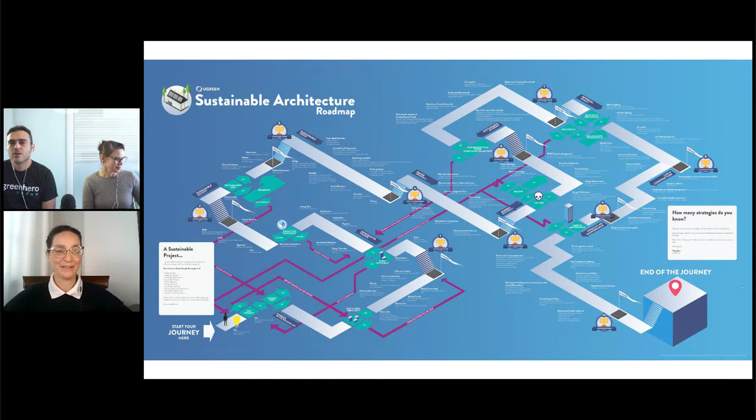Okay, so let's go to the map. 40 minutes on this class, so we need to go to water efficiency, and this is the next step of the process. Okay, let's go on.

So do you want to talk about the concepts first, right, Tisa? We'll put the map here so people can read about this. Just a quick disclaimer for people seeing me raise my hand and saying, let her speak. It's not a problem, we have a little time to say it all. Felipe is trying to keep us on track because otherwise you're going to stay here 3-4 hours. Don't worry, if it's important, I'm going to manage to sneak it at some part later, okay?

Guys, one thing, we are family. Sammy and Tisa are my sisters. We fight when we want to fight. We don't have problems, we fight and then we hug each other in the end, okay? So that's not a problem. All right, we can keep going.

Okay, water. First things first, analyze your weather at the beginning. We talked about it before, and see if it's possible to harvest rainwater, for example. So try to speak with your plumbing engineer and see what you need to add to your design in order to do that.

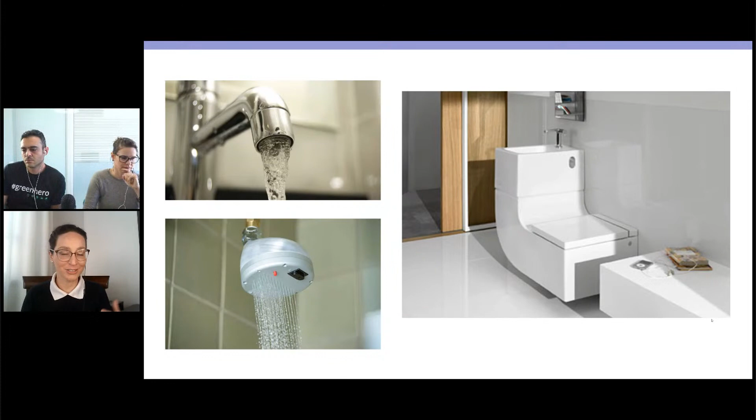You have a toilet lid sink, which is equipment where the water that one person uses to wash their hands will fill the toilet for the next person that is going to use it. So you don't waste water in the process, you're reusing it every time the equipment is used. This is a very interesting idea. Sometimes it's very costly because of the design, but I've seen this being adapted from a regular sink in a regular toilet.

If you talk to a plumbing technician, you might manage to do that too. So this water efficiency part is going to be faster. I think we can revisit this a little bit, maybe tomorrow we can talk about it more. We have lots of things to cover, guys, lots and lots of content. We'll give the best in these 2 hours for you, but we have lots of things to cover.

When we talk about energy, this is a very important part as well. We talked about the simulation, I showed you in practice. So this is a very important part, but when you are doing energy simulation, you are relying on ASHRAE 90.1. This is a standard that rules all of these things.

We have some alternatives as well, we put this for you, you can maybe search this yourself. And then we need to understand that we need to measure this amount of energy that we have. We need to measure things to make it better. If you are not measuring the energy consumption and the water consumption as well, as Tisa said before, you can't improve.

You can't know if you are doing the right thing, right? The idea is to do the project and see in reality. And that's why commissioning is a big part of this. Commissioning is a person who doesn't belong to the company, the architectural company or the construction company. It's a person that is outside this process. This person is going to analyze if the systems that were in the project are really being applied into the real building site.

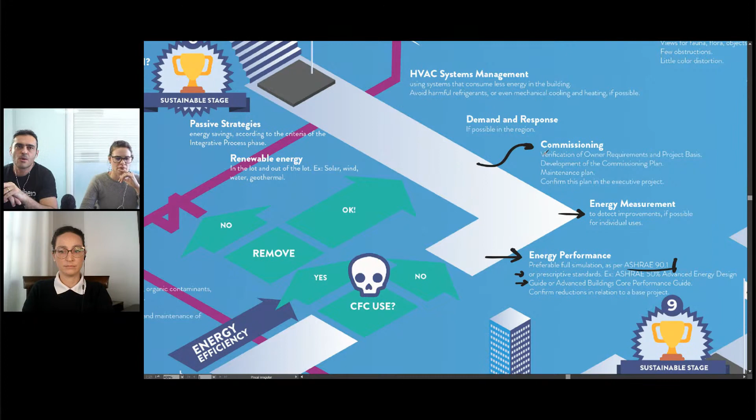And demand and response, depending on the region, we don't have this available. Here in our country, we don't have this available, but we put this to make it more complete for you. Demand and response is like this: maybe your city, people are using a lot of energy, and when they are using a lot of energy, the concessionary, the people who provide energy, they have a plan, an amount of equipment for this energy.

Sorry, what were you talking about? The plan, they usually have a plan, like a city plan with demand and response. And here in Brazil, they did a test in 2019, they started the first test. So the idea is this: if there is a lot of energy consumption, then your building can help the city by reducing some consumption of energy in some systems of your building. So this is an idea, and you can help the city recover from this huge energy consumption.

And then we have, of course, the HVAC, the refrigerants, the air conditioners that you are using. So you need to avoid CFCs. There are some places that use equipment with CFCs, but they are being banned more and more. And we have more effective refrigerants, so we need to use these effective refrigerants in your air conditioner systems.

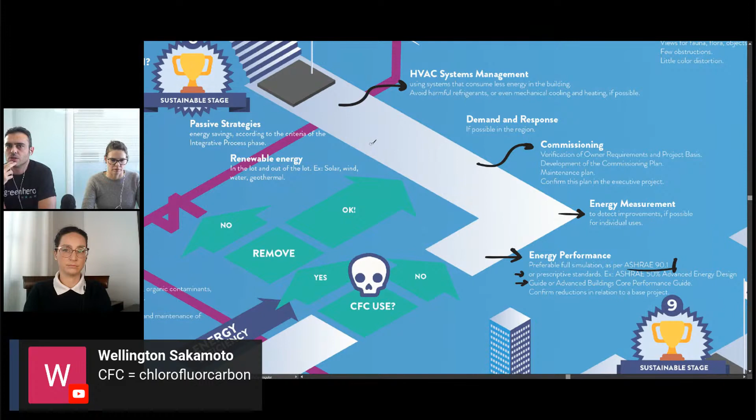Usually when you buy a new system, you are going to have these more sustainable refrigerants, but you need to check. When you are doing a building simulation, you can downsize the amount of this equipment, so you can reduce the amount of refrigerants that are being used in your building. So you are going to decrease the greenhouse gases when you are doing this. This is really, really important.

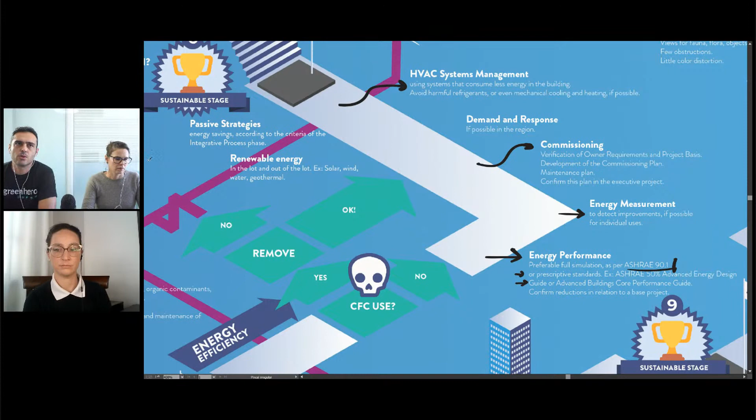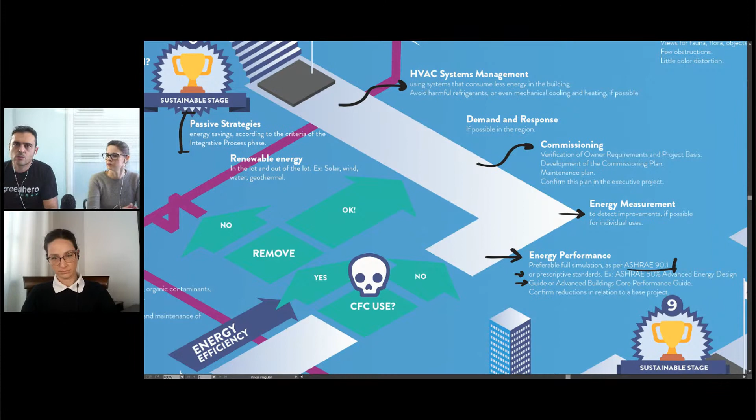And of course, we need to talk about renewable energy. This is the last step, since the use of passive strategies is part of the integrative process, right in the beginning on the map. We talked about the integrative process here in the last class.

This class is not available anymore, but we talked about the integrative process here, and we are here right now. When we talk about passive strategies, it's to put into practice and see if you got the idea you previously planned. Renewable energy is the last part, but sometimes people use this as the first and only part in the building, putting it over a building and calling it net zero.

There are people creating crazy certifications, putting prizes on projects like this, and this is crazy. I've heard this from a client too: he says they have a solar panel that doesn't work because it was positioned there just to certify, not in the best position of the building. It's shaded now by neighbors, and it's just there. So you understand how expensive sustainability done wrong can be - he has a system that's not cheap to install, and now it's shaded and in the wrong position, all because he just wanted a photograph to certify the building, to check that box. This is expensive - things done wrong, just for looks, greenwashing can be expensive.

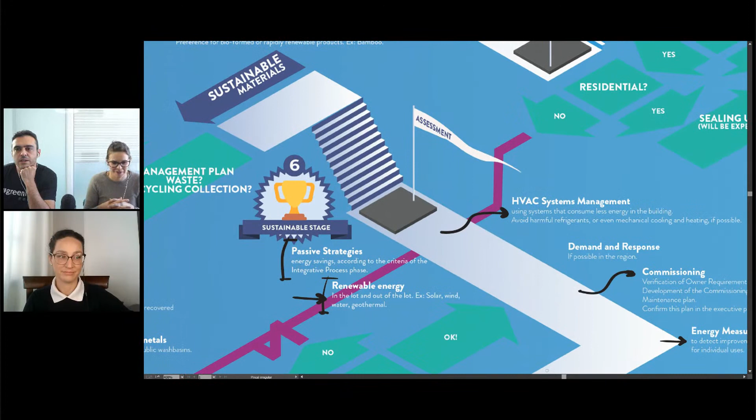So guys, we are talking a lot about renewable energy because we know it's the future, but people think this is the only thing that belongs to the future, and it's not. So we could put maybe a hashtag for this class related to renewable energy.

I will think about an inside joke while Sam is talking about sustainable materials right now. I think, okay? Jesse wanted to add something too.

I would just add that the hour your client is paying for you to think about the design costs much less than whatever renewable system you are using on that design. So if you spend more time thinking about it and designing it in a passive way, you will reduce the energy, and then they will buy less equipment. This is the logic, and they have to understand that. You can put photovoltaics in a shoebox and it will work, but is it sustainable? Come on.

Let's go, guys, I'm raising my hands. That's why I'm going to scream right now - Green Hero Rise, let's go on! Tell us in the chat what you've learned, because you are amazing and we want to know. If you learned anything, tell us, or if you're here and haven't learned anything, shame on you. People are screaming Green Hero Rise - I want to watch you learn, not just scream with me, but you can scream with me too. I'm sure everyone got the idea, and they probably scream at home too. If you always scream very loud, maybe we can explode the planet with the Green Hero Rise. I'm just joking, I just want to know what you guys learned so far. We're in a big office and can't scream as we wanted to, but we're doing our best so our neighbors are happy with us. But you can scream as much as you want, okay, let's go on, just joking.

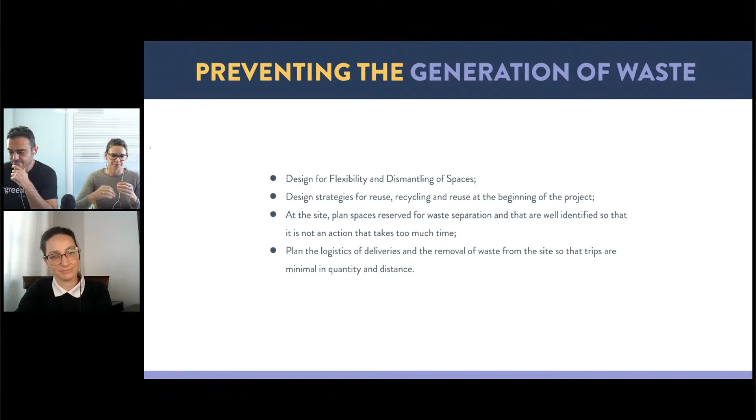When you're thinking on your site, properly condition your materials. A lot of materials are wasted because they are not properly kept on site, and sometimes rain and wind take away or destroy part of these materials. Also, materials have an expiration date, so buy wisely according to your project chronogram, because sometimes you can waste materials by letting them expire.

Plan the logistics and don't put materials together with dangerous waste. Broken mercury vapor bulbs cannot be thrown in the same place. Tiles with asbestos, different problems with paint and old batteries, plastic, anything that's contaminated, like air conditioning filters—all those things need to be separated properly.

We're getting a question. Last question, I promise: can I burn material on site?

No, that's not wise. You should not burn materials on site. I ask because I've been asked that on site, and I know in many places people do that, so it's important to note that's not the best idea. And if materials do go to incineration, they should go to a proper plant that deals with the proper filters, because sometimes a lot of the materials you're burning, even plastics, have fumes that can contaminate the air. So you have to be careful with that—if they are being incinerated, they need to go into a plant with the proper filters on the chimney.

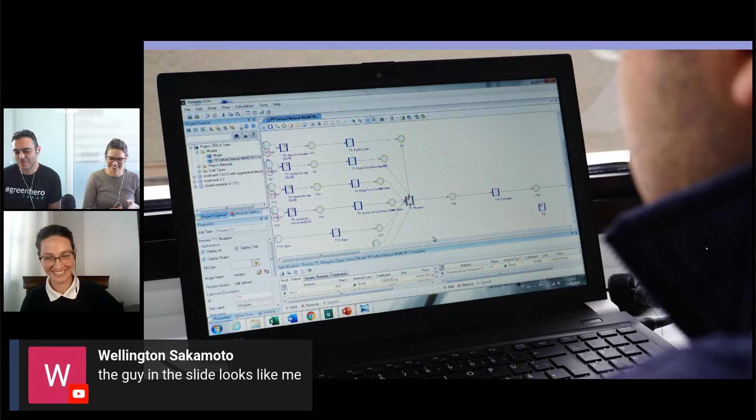Here you have a picture of Wellington, who you guys have been talking with on the chat. We promise we're going to have a better picture of him next time. Someone in the chat said the guy in the slide looks like me. Yes, Wellington is our chemical engineer here in the office—great joke, man.

Wellington is a chemical engineer. I totally lose track when the jokes come in, because I'm that girl who used to sit in the back of the classroom and laugh at every small or big joke—I couldn't contain my laugh. I was actually in the corner of the class. Because of my height I was always placed in the back, not by choice, but then I got used to it and liked it. I like the people in the background.

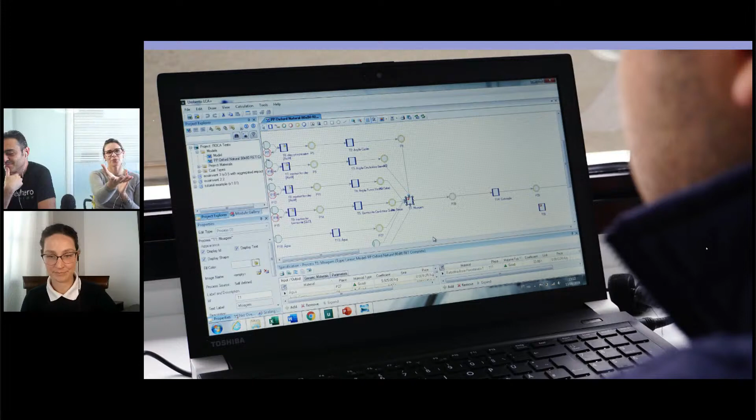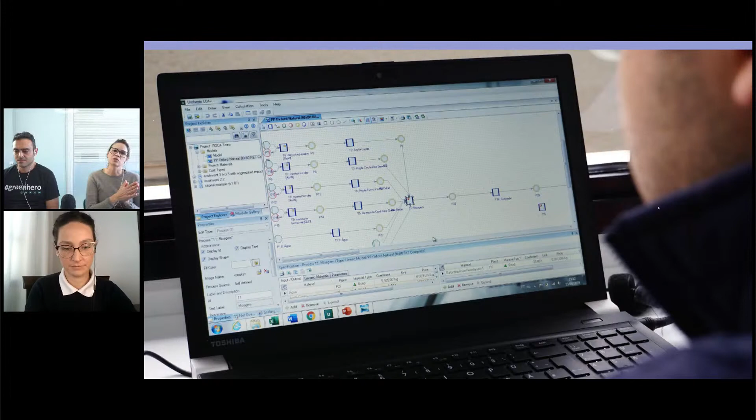Anyway, so what is Wellington doing here? As you can see, this is Umberto, a life cycle assessment tool that we use from iPoint, and this is part of our work here. Our involvement with materials and construction got us into the industry, and the industry was interested in relating to architects and engineers in a better way. They started talking to us, and we began developing life cycle analysis for construction materials so we could communicate better. This has been great work for us.

So materials was something like this, I think, right Sammy? Yes, and now we have something important—maybe you hadn't seen this. I will bring something new for you here: Green Hero Rise. Let's go on. I want to know what you guys have learned so far.

Tell us in chat, because right now we are going to have a very cool practice about natural light. People, it was the winner yesterday—it almost lost to artificial light, but natural light was the winner. So we are going to see this concept, and I want to know what you guys are learning so far. People are screaming out, right? Neighbors are complaining.

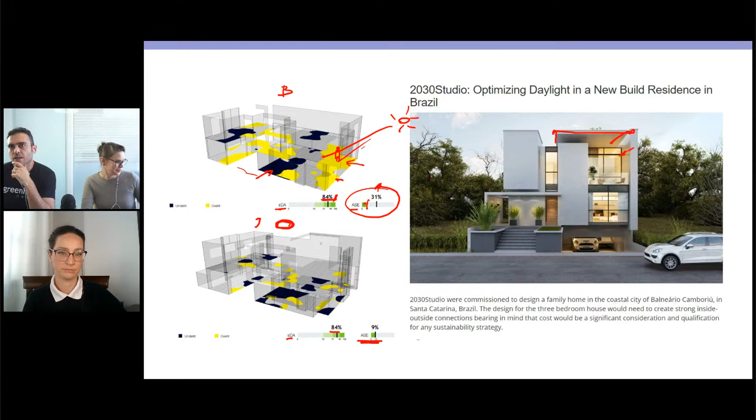So this is the way I do facades when I develop projects. I do consider this. So I did this shading device here, right? We can see the shading device here. I put this glazing, and did some depth here in this area. So we changed a lot on the building facade considering these properties. And then, of course, we might change properties in the glass if you want. So this is the major idea. And this was a project developed in Balneário Camboriú, okay?

But before we proceed to our building simulation, I'm going to do this right now with you.

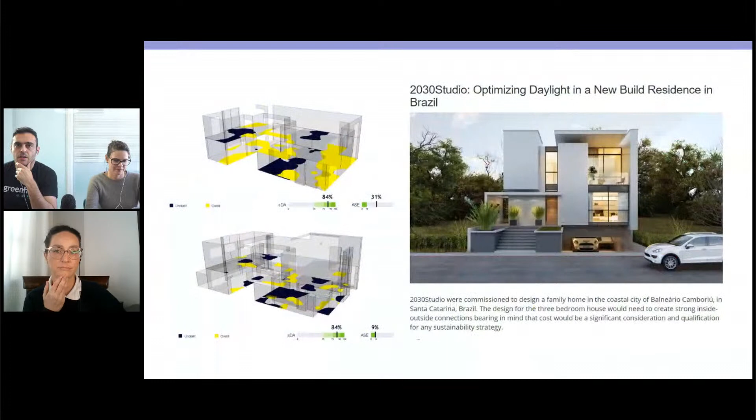And let's go on. So we have this study here, and now we can see the baseline as well. Of course, this area is not as important because it's a parking lot.

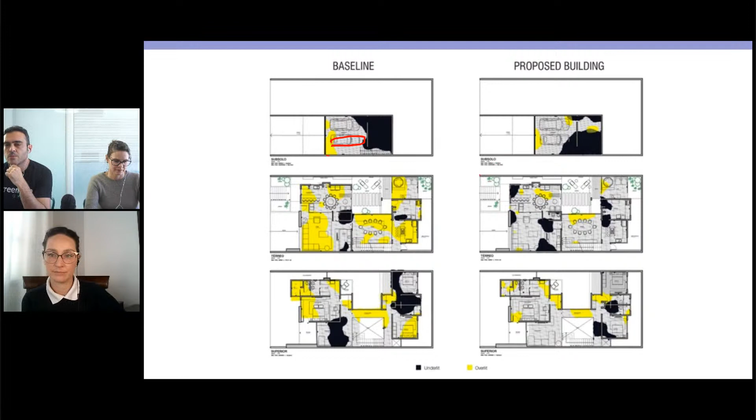You can see a car here, but we can improve a little bit. So we improved a little bit, and here you can see the improvement, right? These areas here, we shift into this. So this is very cool.

Bears are dangerous. Now we are going to see how we can calculate our daylight, and we are going to use a software here called Lightstanza.

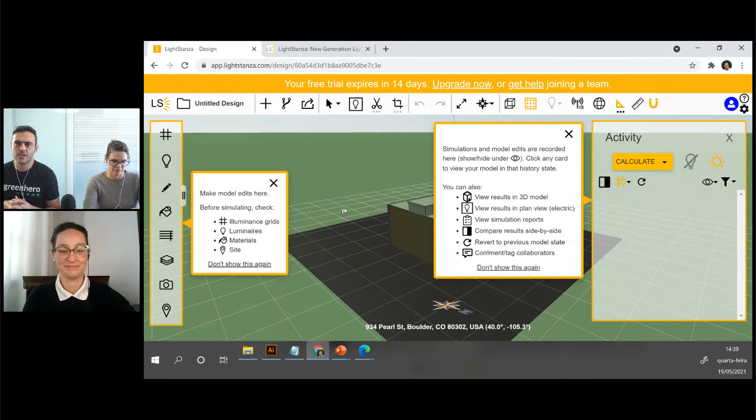That concept of SDA and ASE, this is a standard from IES LM-83-12. It's a very important standard, the most modern standard when you're going to analyze daylight quality in your space. If you get LEED certification or WELL certification, you will need to comply with this standard mostly, because it's the most normal standard. It's been out since 2013, 14, so it's new, and you are going to get the best, because we are bringing you the best.

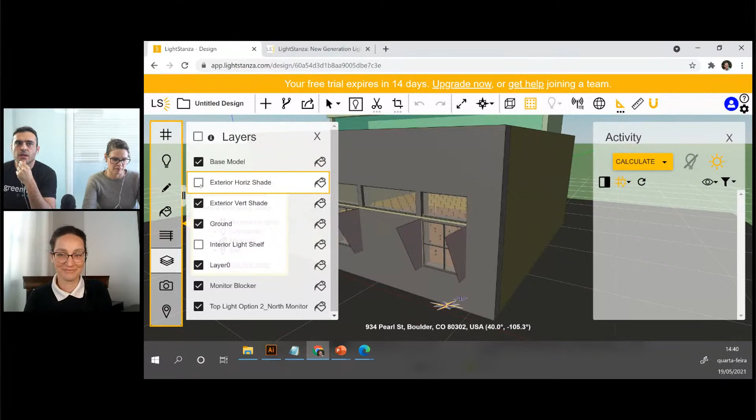So we have this school here. We can see the school, and we have some layers in this software, and we can turn on external shades, horizontal shadings and things like this, but I will just keep it as is, without the shadings.

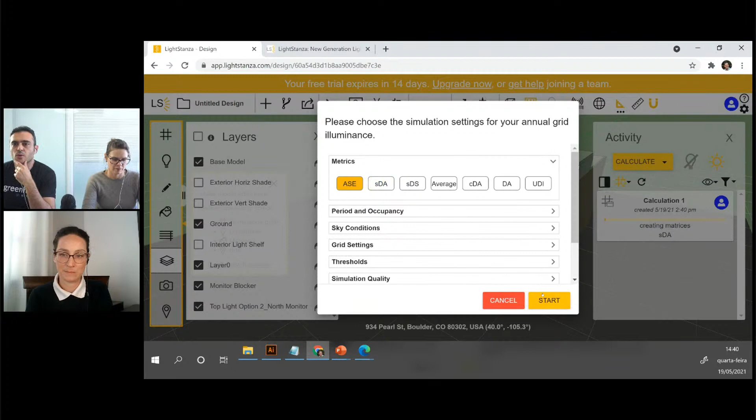I will calculate these two concepts: the annual grid illuminance, SDA, and then the ASE. I'll calculate the distribution, the optimization of the distribution in the space, and the amount of glare. So ASE for glare, SDA for distribution, and I will also do an external horizontal shade and an interior light shelf in the project, and calculate that as well.

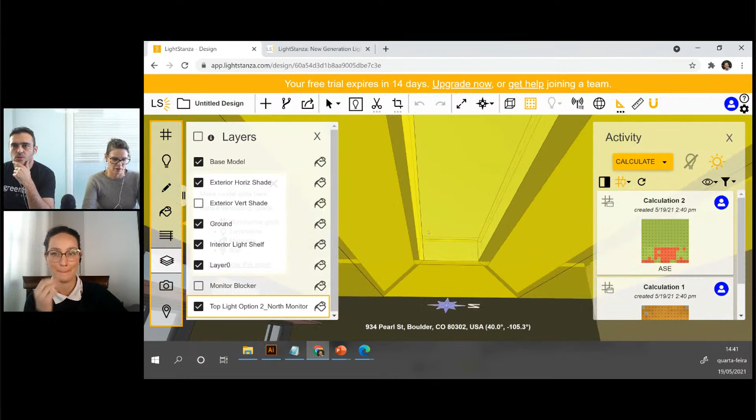I will remove this monitor blocker inside here, because in the first analysis that I'm doing, I'm simulating without the light coming from this place. It was closed. Okay, now I removed this.

Sorry, I forgot, laje, laje means slab. No, slab. Slab. Yeah, yes.

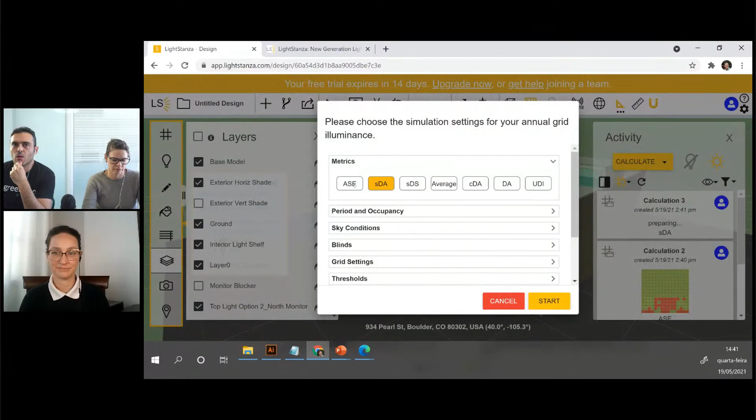So I removed the slab there, and I put the shading devices, and I will do the same calculations again, SDA first, and then I will calculate the ASE again. While it's calculating, I am explaining and saving your time, because we want to bring the best value for our time.

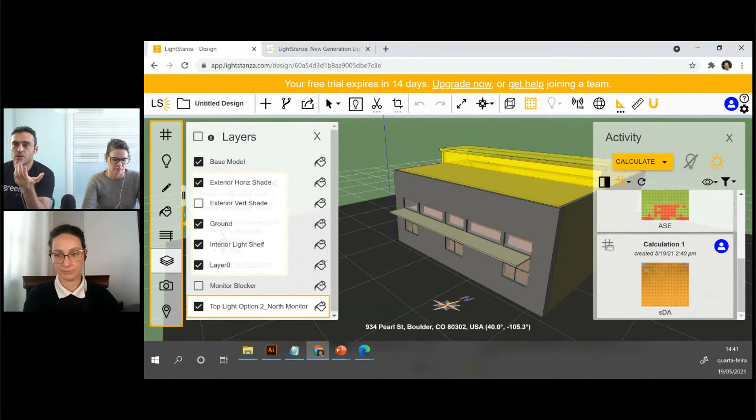So this is the simulation that I did first, without the shadings, remember, without the shadings and with this monitor blocker, without the clerestory window here. I will just click SDA here.

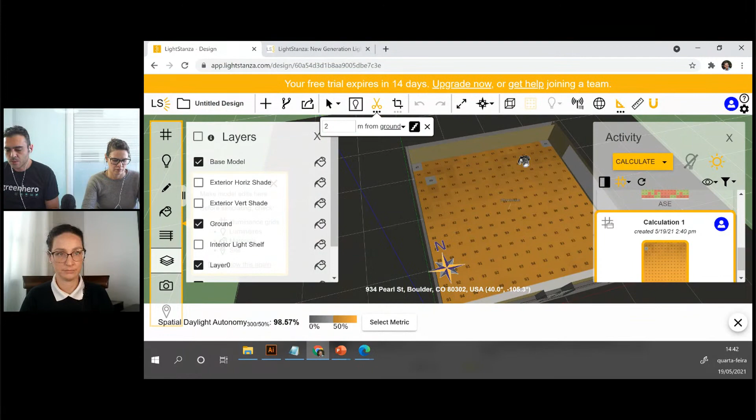And then we can see these areas here and what it means. You can see here, right, 89, 91, 93. So the concept is, okay, I will explain here. I will just put this in so I can explain better. Think about this, 90%, 93.

What I'm telling you is this: we have more than 300 lux in this space. 300 lux is a good amount considering a school, a classroom. I'm getting more than 300 lux for more than 50% of the hours in the whole year. I'm analyzing the whole year, and the simulation calculates hours between 8 a.m. to 6 p.m. For more than 50% of these hours, I have more than 300 lux.

We have actually 90% here, which is great. And here we have 47%, so I'm below 50%, and here as well I'm below 50%. But we reduced this amount of areas here with a good distribution. And we can see 66, 67, and this is great, actually an outstanding analysis on light distribution.

But when we look at glare, remember we are not using any shading devices here, we can see that we have glare.

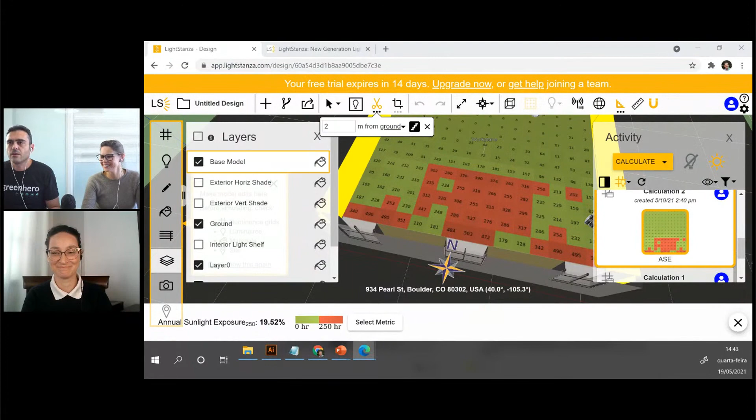And what does this mean here? We are analyzing the whole year again. Okay, once again, SDA, right? I will just recap, don't worry.

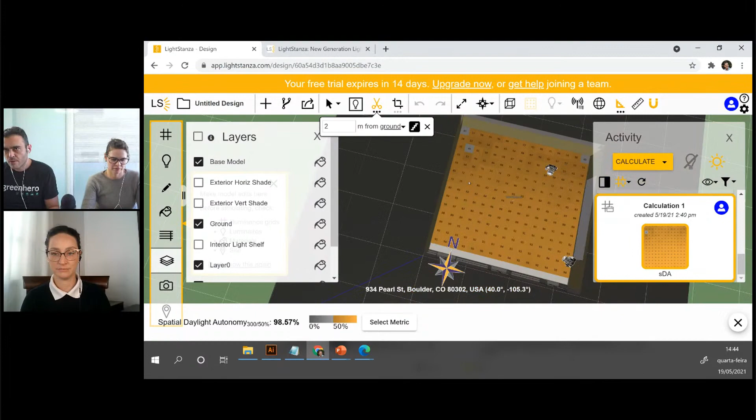So we have 93%, 92, and then here we have 49%, it's below 50%, 47, also below 50%, but we can see we have a very cool distribution in this space. When we see the ASE, remember we are not using any shading devices here, right? It's important to mention that. We can see these red areas, and if you see something red, you know that's a problem.

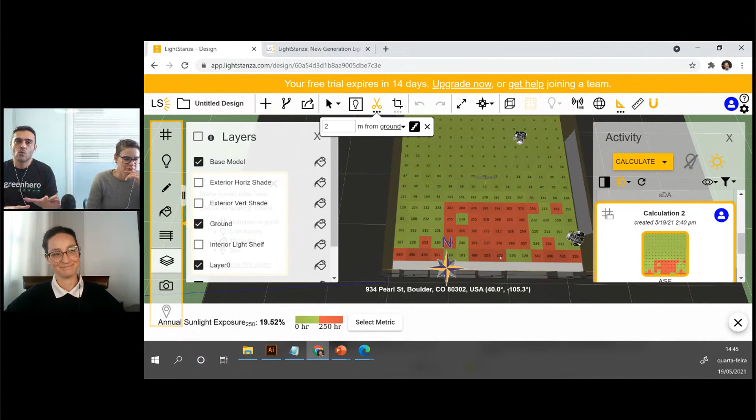I'm complicating things, let me just recap. I'm analyzing the whole year, and I don't want to have more than 250 hours in the whole year with more than 1,000 lux, because 1,000 lux is very hot. I don't need 1,000 lux, I need 300 lux. So we don't want more than 250 hours in the whole year with more than 1,000 lux. If I have this, we are going to have problems.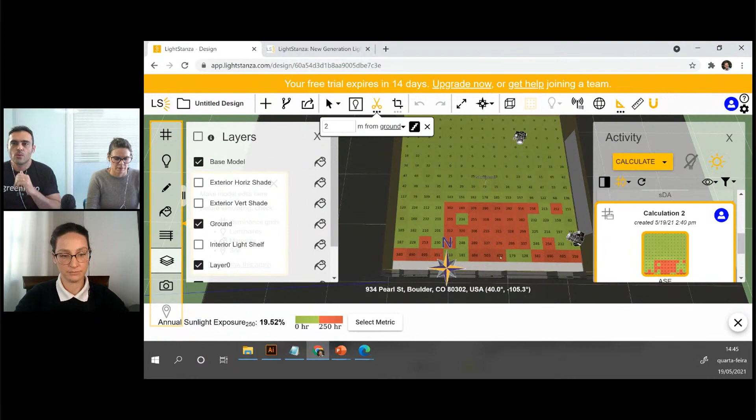So we have problems here. We can see we have a good distribution, a good amount of light here, but we have lots of glare. So we have good distribution, we passed this, but we got problems in this. It was like my project that I showed you.

But then I did another analysis considering the monitor blocker, this shading device here, considering this opened. And then I can see the SDA distribution. Distribution is fine, actually we improved it here because we had this window above the classrooms. So we can see 85% here, outstanding distribution.

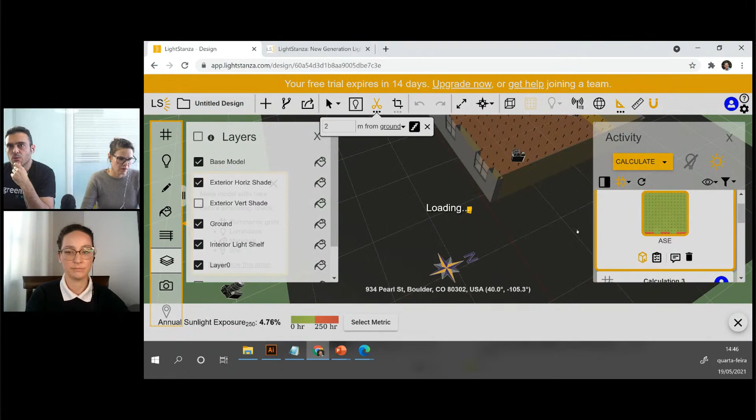And then when we see glare, we removed lots of glare, right? We can see now I just have glare in a small amount of the building. We reduced a lot of this glare. So this is the path for you to achieve a good project.

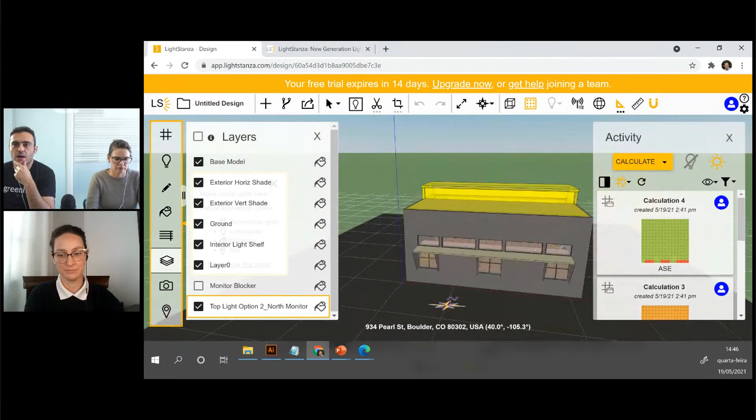Then I can put maybe an external shading device, I can change the design, I can change things, I can change inside colors of the building, that can make a difference. So I can put this and then analyze again, and try to avoid this bad glare here. Maybe you are improving your project, trying your best. So it's up to you. You understood the process, okay?

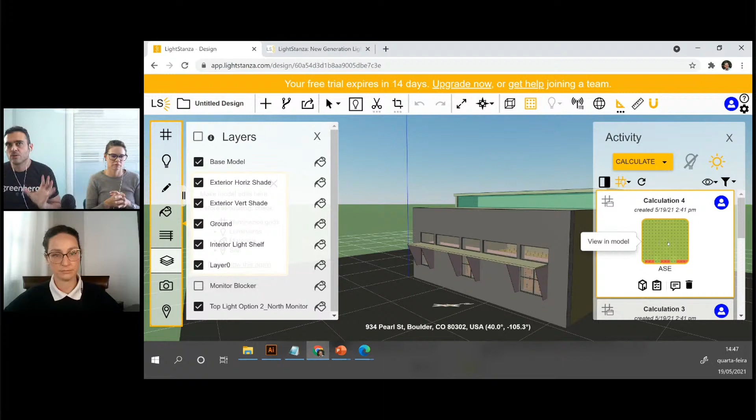So this is the way to do a natural light analysis, and I made a big summary just to show you this concept, okay? So you can try LightStanza, maybe you can see for yourself. We are not affiliated or anything, just showing the concept, okay?

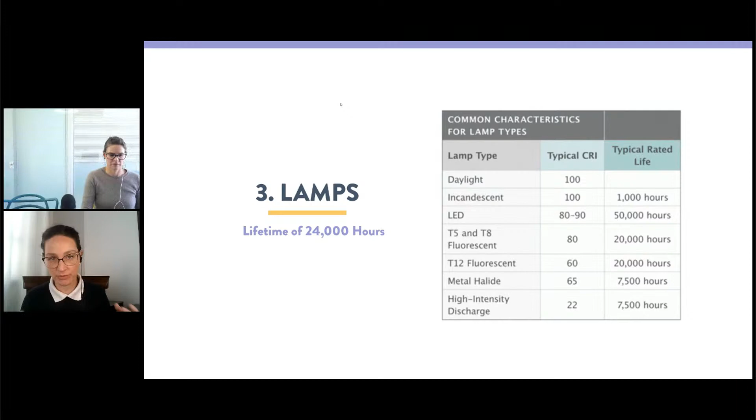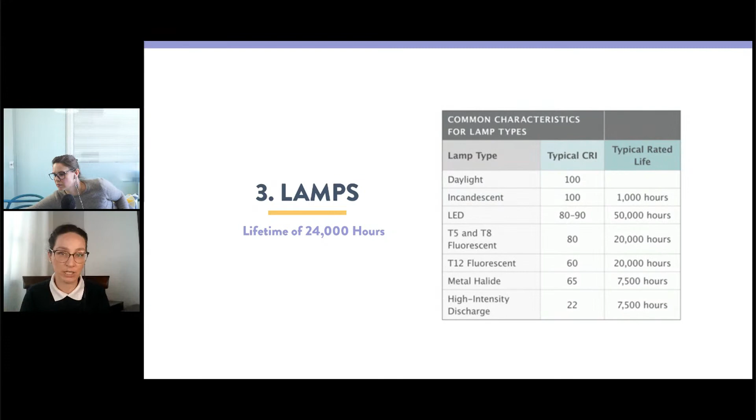You have to reach the light levels that the standard, the local legislation in your area requires, and also related to the activities that people are going to do in that space. So you should look at that.

But one thing that's really important to look at, besides the lifetime of that lamp, is also the luminous efficacy.

Am I saying it right? Luminous efficacy, yeah, it's the proportion. Efficacy, yes, thank you.

It's the proportion of light that a lamp provides by the power that it takes to work. So it's the amount of light it gives you by the energy it takes to provide that light.

So the more light it provides, the better, because it's using that energy to make the most of it for lighting, and not, for example, for heating, which is what incandescent lamps usually do.

This is why people prefer LEDs nowadays, because they provide more light while using less energy.

All right, Felipe? Yeah, we can go on. I'm alive, let's go on.

So we have direct lighting luminaires, and the idea is to have the minimum possible. And you can understand some concepts of indirect lighting.

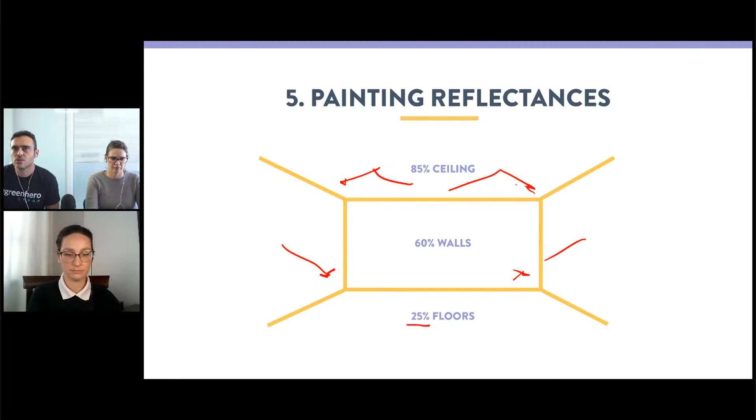And when we distribute light better, you're using light wisely, and of course you're going to reduce energy. So this is the major idea, and we can use this on furniture as well.

But 45% is good. And then we need to think about the contrast. Think about your space—let's say I have this.

Maybe I could share some artificial light simulations in one of our classes, maybe tomorrow if I have time, but we can see this. When we have this light amount, maybe we have a table here, right?

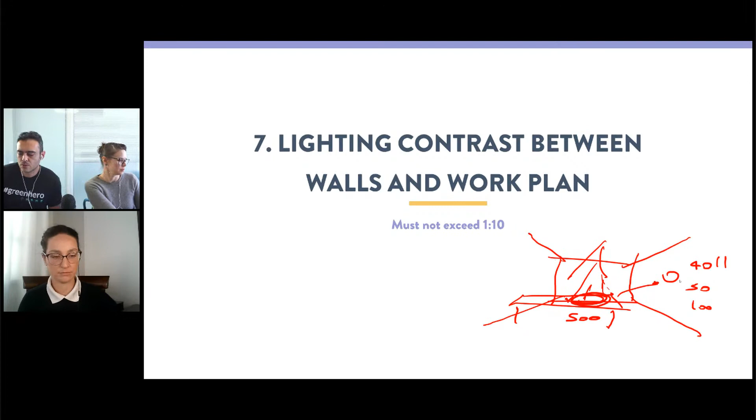We have this table and this amount of lighting over it, but we don't want, let's say, 500 lux here and only 40 lux here. It's not good because you're seeing here with 500, then looking here with 40, and that's a lot of difference. So you don't want to exceed a ratio of 1 to 10, maybe 50 here to 500 there. So 50 to 100 is going to be best, because you're looking here, then looking there, and it's not making a huge impact on your project and the quality of sight and vision.

We have hospitals, of course. When you're talking about hospitals, we are talking about control. We need to have individual controls, bring power to people. Patient spaces need to have control as well. And when you have multi-occupant spaces, you need to provide on, off, and mid levels. So these are three ways to do it.

This is great because maybe in your space, I'm just drawing here, let's say you have a lamp here, a lamp here, and a lamp here. Maybe you have a good amount of light here from the sun, but maybe here you don't. So if you can put a mid-level, you can put this space just to bring the supplementary amount of light you need, instead of using all of it and wasting energy that isn't needed at the moment. So this is the idea.

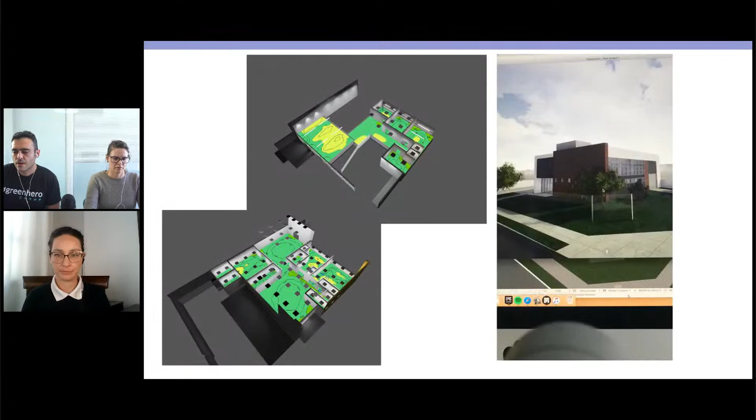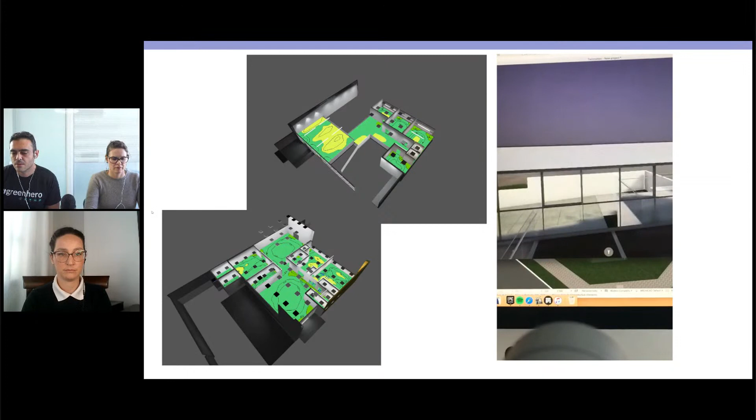This is a simulation we did in the office, for a project we were developing. It was in a very early stage when I took this, and we can see the same concept here, this amount of light that we wanted. Sometimes you need to change types of lamps, and this is also a great way to do things. So this is the way to go.

And we have a little bit about thermal comfort as well. We can talk about it very quickly. I will show an example of how we can deal with thermal comfort.

When developing thermal comfort, this is usually the worst, the most difficult simulation we need to do, because we need to deal with people, and people have differences. We have six phenomena in our spaces: the temperature of the place, the temperature of the surfaces, which is the mean radiant temperature, the humidity of the place, the airspeed, the insulation of the clothing, and the metabolic rate.

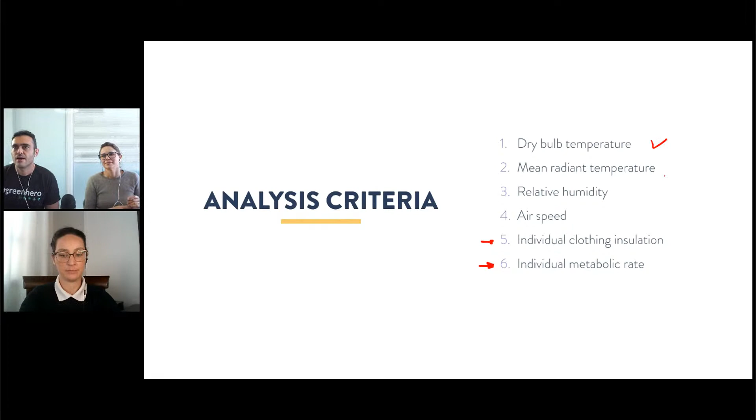Let's say I'm here with Sammy. It's cold outside. We can have the same temperature, the same humidity, the same airspeed, the same clothes, although hardly ever the same clothing since I'm usually cold. Let's say we have the same metabolic rate as Sammy, but if she's closer to the glazing, she can feel a little different about the weather. So these are the six things you need to analyze when doing a thermal comfort simulation.

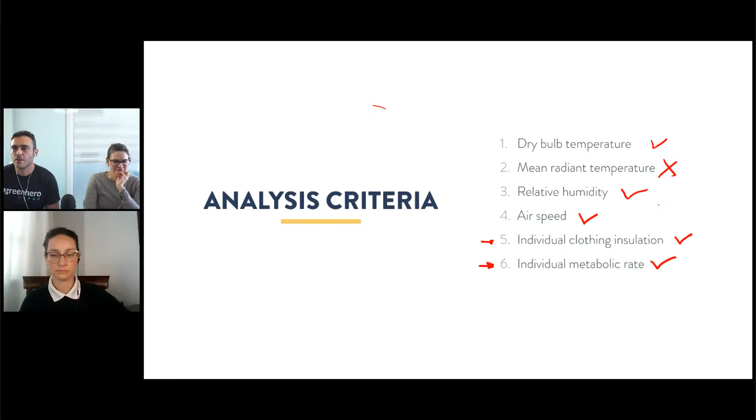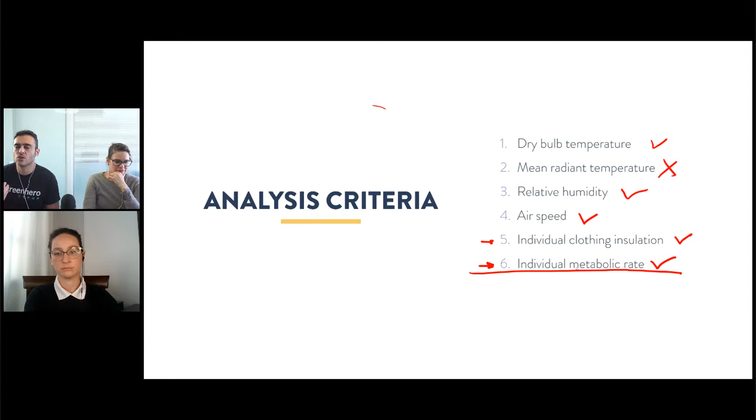Let's say we are in the same place, the same position, but Sammy is doing exercise. That's going to change her feeling about the place. Maybe for me it's good, but for her it's not, because she's exercising and feeling hot. So when simulating, you need to consider all of these things, and that's why thermal comfort is more complicated to analyze.

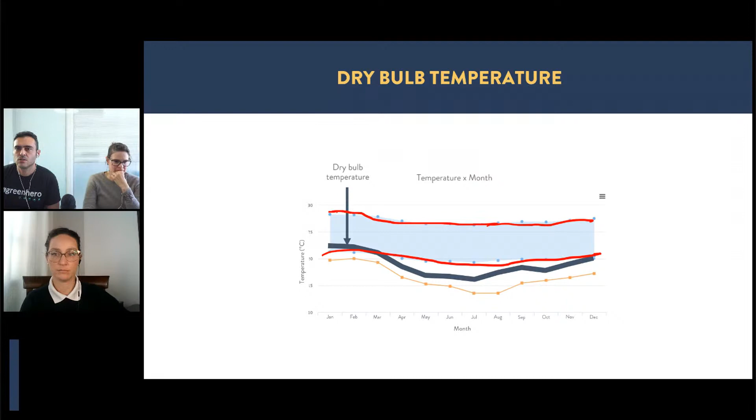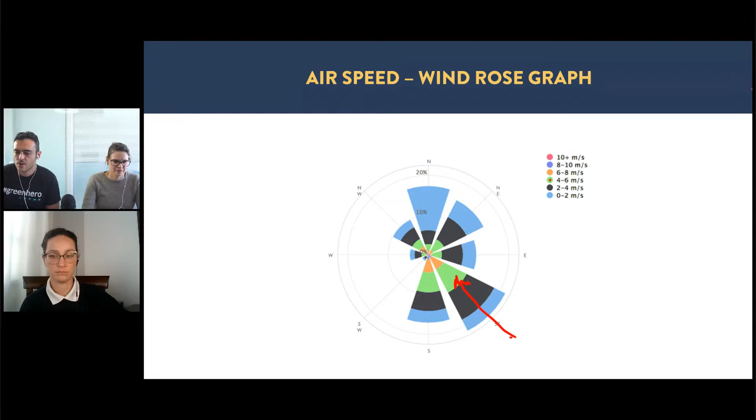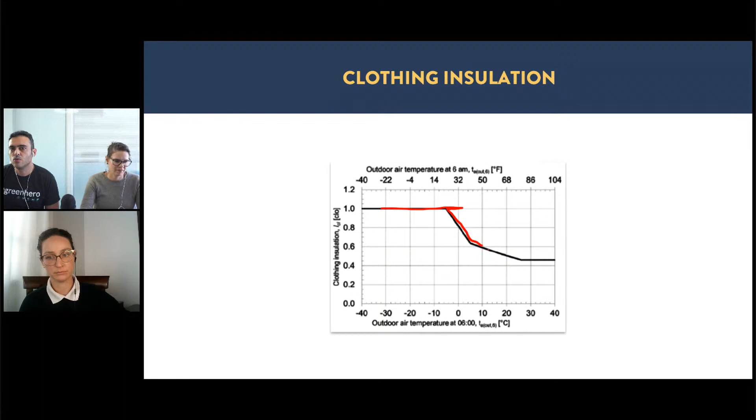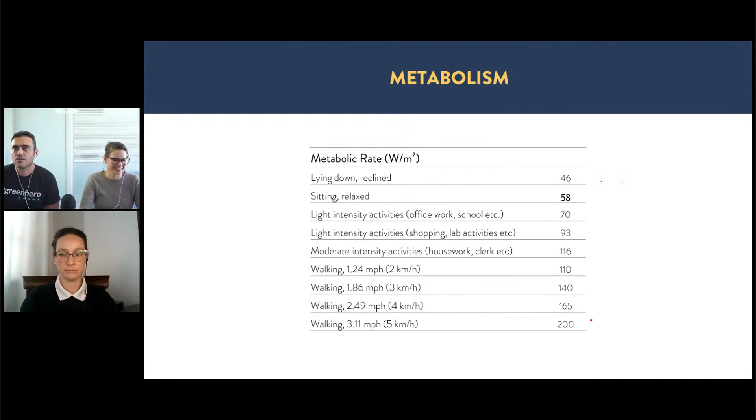We need to consider the clothing insulation. People have a clothing insulation, and during the day they maybe remove the clothes or something like this. So we need to consider this during the day, and we need to consider the metabolic rate. Sammy is, I don't know, walking, and I'm lying down or something. It's going to make a huge difference.

And then the standard that regulates this is ASHRAE 55, usually United States, and in European countries these are the standards that you can use.

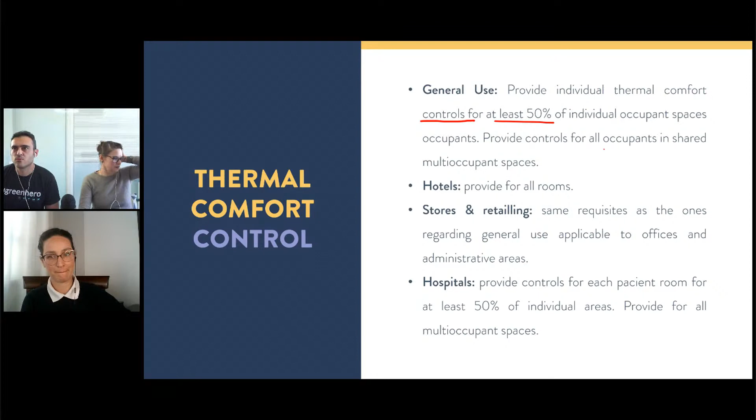Then we have some controls, and you can see the light, internal light and thermal comfort. It's all about controls. We need to see controls for individual occupant spaces. We need to provide controls for at least 50%. Multi-occupant spaces we need to provide for all occupants. And hotels, retail, you can see, usually we need to have more control because, as you can see, people are not the same.

They have differences. We have opinion differences here in Brazil about politics. People fight, families are dismantled because of politics. And thermal comfort is not different.

One thing about controls and thermal comfort is that sometimes there are fights in offices too. People like raising and lowering the thermostat. So you have to have some sort of policy and tell people why it's at a certain temperature, and people will feel slight discomfort. It's not a reason to be raising and lowering the thermostat, because then you are dealing with energy efficiency too, and this can be bad.

As Taha is telling here, ASHRAE 55 is for thermal comfort, ASHRAE 62 is for natural ventilation, ASHRAE 90 is about energy efficiency. We have NC 60 as well for acoustics. So we have lots of standards to cover.

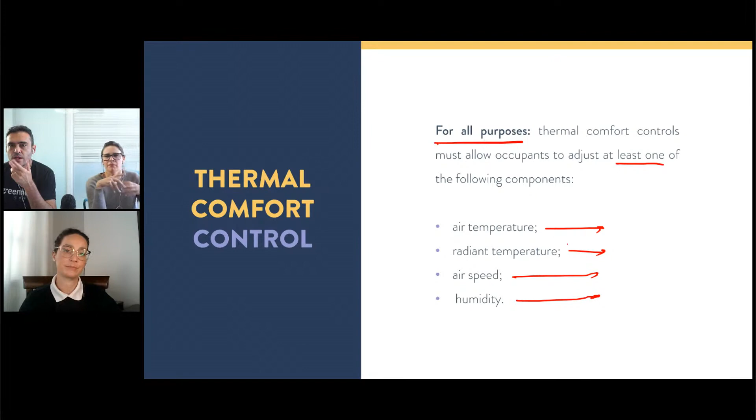And if you are doing truly sustainable design, you need to understand these concepts. So this is an idea: you need to provide, when dealing with thermal comfort, at least one of the following concepts: air temperature, radiant temperature, air speed, humidity. So this is the way to go.

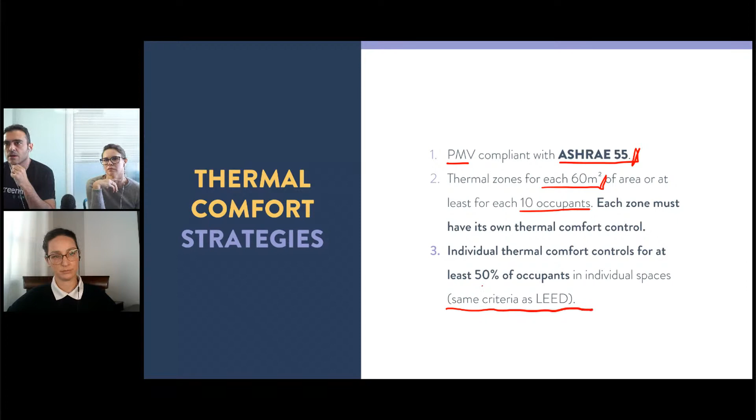And of course, we need to provide this PMV. It needs to be compliant to ASHRAE 55. This is a great standard. Thermal zones for each 60 square meters or at least 10 occupants. This is what LEED and WELL certification says. So we are bringing here the best certifications for you to understand.

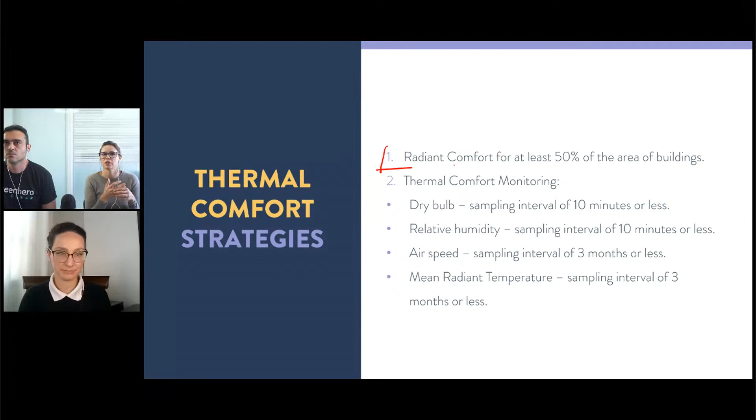Some people have mentioned before that it usually is not ASHRAE that regulates your legislation, but you can compare your legislation with ASHRAE and see which one is more strict. Usually it's best to work with the one that is most strict, and of course, within your legislation. So this is the way to go.

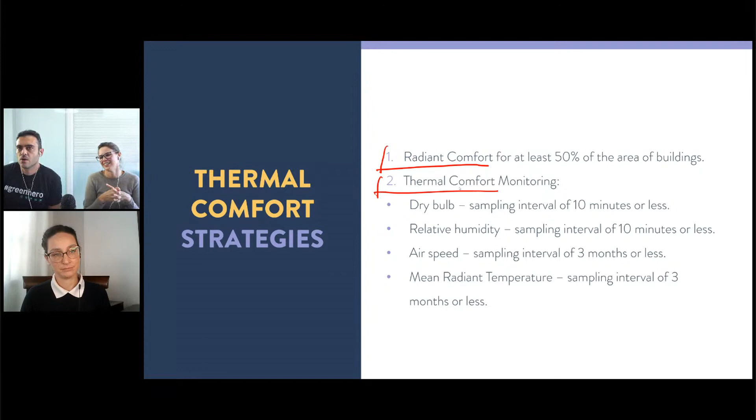And of course, maintain humidity. You need to add or remove humidity when necessary. Usually this is for certifications, and of course it's going to make it better for your place. So this is the way that health... the way we analyze.

And then we are going to proceed to a case study. We didn't show lots of case studies today. I just want... maybe we can do it.

I just want to show this case study here because we were developing this project, and we can say that we had the idea of the architect, and I just want to tell you the main idea.

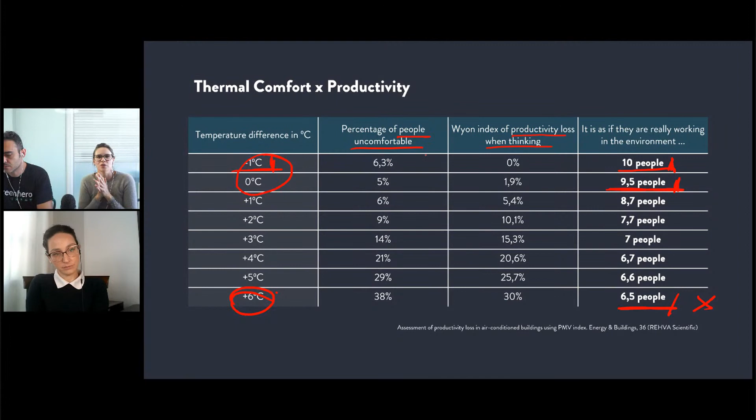When you show your client the importance of thermal comfort, definitely show that chart, because when he understands that he's paying for people that are not actually producing as much as they should, he will understand the math and understand why thermal comfort is so important.

So guys, I will show you a very quick step-by-step to end this class. The idea here is to present the climate, how we analyze this and how we develop our projects. The first step is to read the climate, as we know from the first class. Read the climate, understand it, write the stats, and see how our comfort zone is. We can see this comfort zone, right? We want to be in the comfort zone.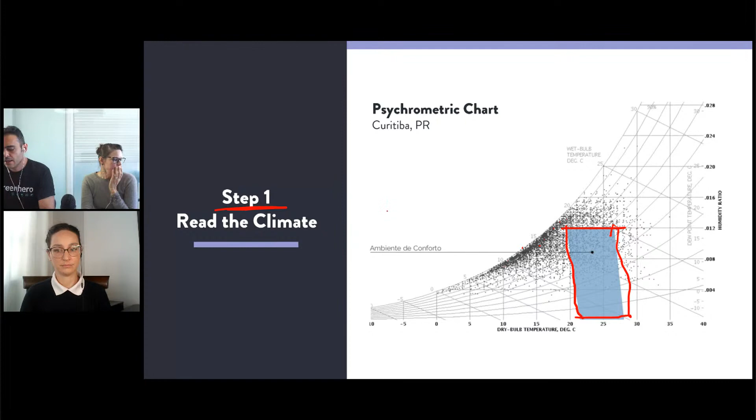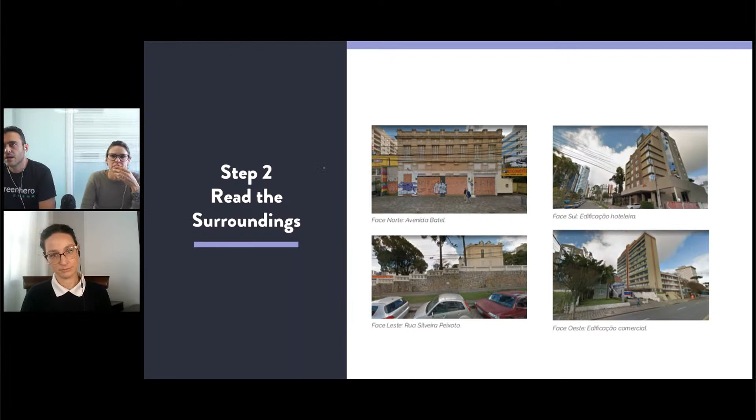Then we go to the second step, to understand more about the climate, the comfort areas, and things like this. We understand about the winds, about the surroundings, the building surroundings. So you understood climate, then surroundings, then owner and architect requirements.

So in this project, there was a very strong requirement that they wanted it to be like a boutique store, and we couldn't do everything we should or could be doing. We couldn't have shading devices or things like this. It was more about the glazing properties, choosing wisely the glazing properties, about automations inside the building, some blinds, some shade, some internal blinds we could be using as well. So that was all about the properties.

Then we had this requirement, and this project came when it was already ready for approval, so we couldn't do much. And that's one part of consultancy, guys. If you're working with consultancy, you need to give all the tools for your client to make the decisions, but understand that you may have some limitations. Working with consultancy, it happens that.

Then we have this. We had this type of glazing that was a requirement of the architect as well, and then we read this, of course, and then we started to see how it was the occupancy schedule, because it was important for us to know.

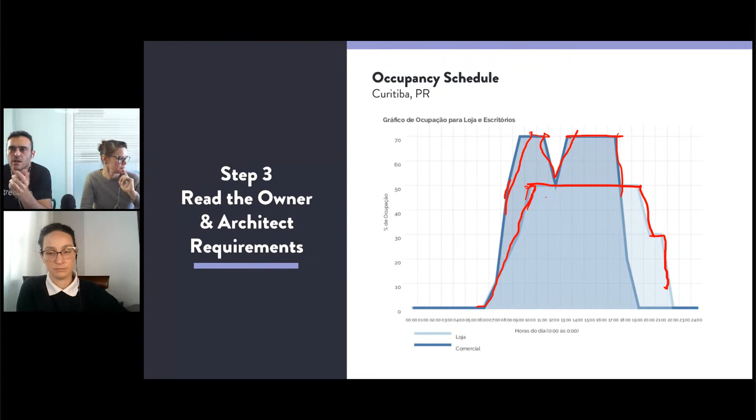We had a retail space, right? This is the retail, this is the office. People are entering later in the retail because the store opens later, then we go through all the day, and then people leave the building. But in the office, people arrive earlier, and they're going to have lunch, leave, go back to work, and then leave the place sooner than the retail. So these things make a difference actually on building design and performance. You need to understand this, because maybe you're dealing with a strategy that people won't use, or lots of light during the night that isn't needed. So it's important to know.

Thermal comfort, as I said, predicted mean vote, it was important. We analyzed this, and we were hired to analyze thermal comfort in the first place.

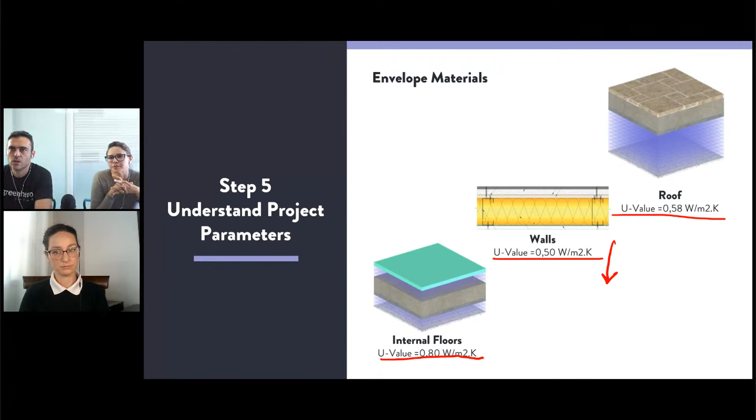So we start to analyze the project parameters. Of course, lower U values tend to reduce energy consumption - walls, roof, internal floors. So we saw the U value of all of these features, and how reducing or increasing something could make it better for the building. So we analyzed all of this, and we could suggest improvements on this project.

So we start to analyze, and I like to say that it's like analyzing Ozzy Osbourne. Ozzy Osbourne in the 80s did lots of things wrong, and if he went to a doctor, he was going to have lots of problems. So people need to understand what is the biggest problem.

So let's say we are analyzing this facade, as we showed yesterday. We are just analyzing this facade here, and then I'm telling you solar heat gain is the worst problem that we have - this is the first problem. Equipment gain is the second, and glass conductivity is the third.

So we understand the solar heat gain is about the glass, right? The glass, the SHGC, the solar heat gain coefficient. Every glass we can show tomorrow, maybe. You want to? No, okay, no, no. Okay, tomorrow, let's do it tomorrow.

Yeah, because SHGC stands for solar heat gain coefficient. So we need to reduce this index to improve our solar heat gain. Then we have equipment, maybe we could change some things towards equipment. And glass conductivity, we can say maybe we could put a double glazing to improve conductivity, which is the amount of

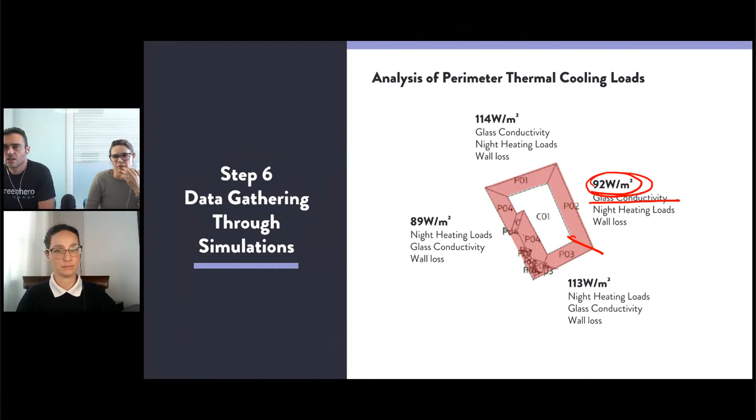You need to analyze each facade individually. That's the importance of choosing your materials, and each facade being treated differently. It's not necessarily a bad thing, it's actually something that will contribute a lot to the design.

Yeah, and this was the project, let's say here we are using a no-color glazing. So we have lots and lots of glare, lots and lots of these yellow areas here, you can see. And some areas with no light as well, so we can make it better, right?

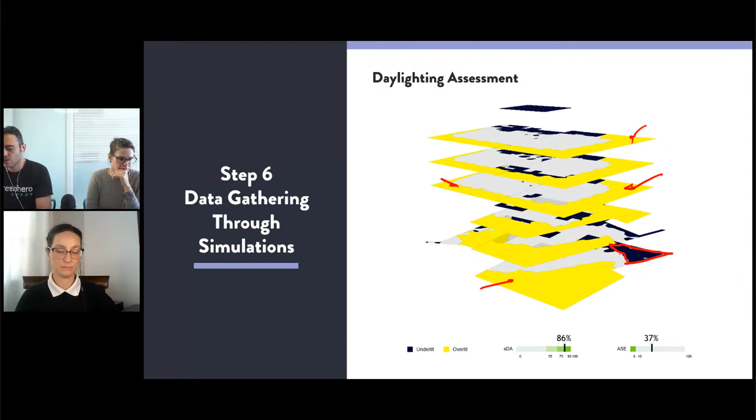Okay, so we understood this, and then we started to improve. We can improve this. We understood the major problem when we are talking with on glazing, glazing type project with lots of glazing. We have this thing called thermal asymmetry. Cold gets here and enters very fast.

You have the air conditioner turned on here, right? The air conditioner is turned on, it's trying its best, but we have... sorry, he sneezed. Huh? I was sneezing. Oh okay, sorry, let's go on.

So we have the solar heat gain. Let's say it's very cold here outside. We have the air conditioner trying to heat this place the best, but this person is working here. So it's coming inside the building, this cold, very fast, and this person is dissatisfied because it's feeling cold here and hot here. So it's like a hell for this person.

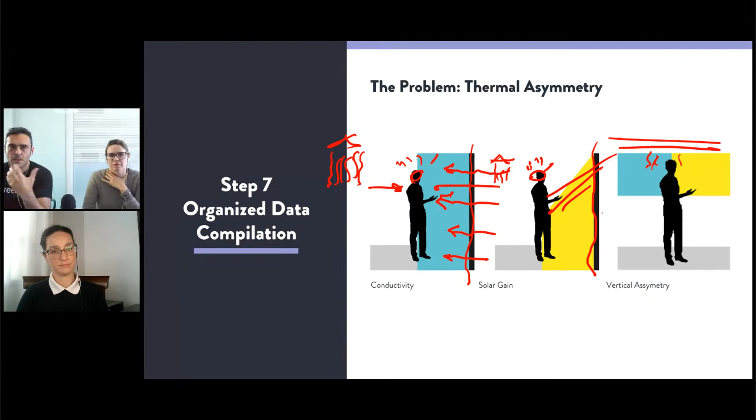So you can have the best equipment system, but you can deal with health issues in your building when you are dealing with a situation like this. So this is why it's important to analyze the project since the beginning, all of this that we are simulating, talking with the materials. So this is the way.

Then we start to analyze internal blinds. We can put internal blinds on north facade, east, south, and west. See here, if I put an automatic shutter, if the temperature is more than 24 degrees, I improve the performance.

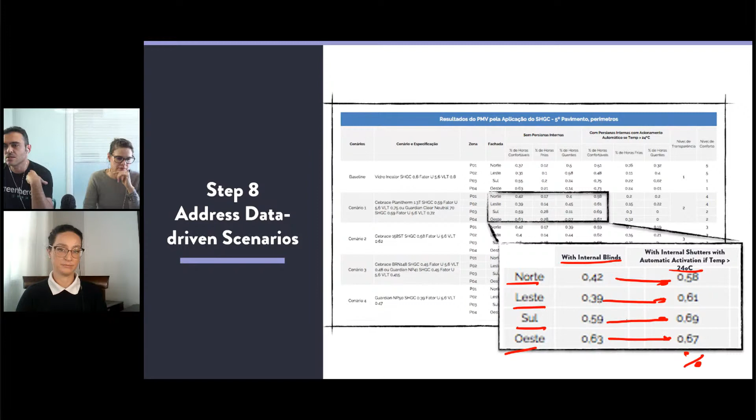So now I have a better percentage of people who are satisfied. I'm improving this - you can see 63 to 67, 59 to 69. So this is the way to go. On each facade, we do this.

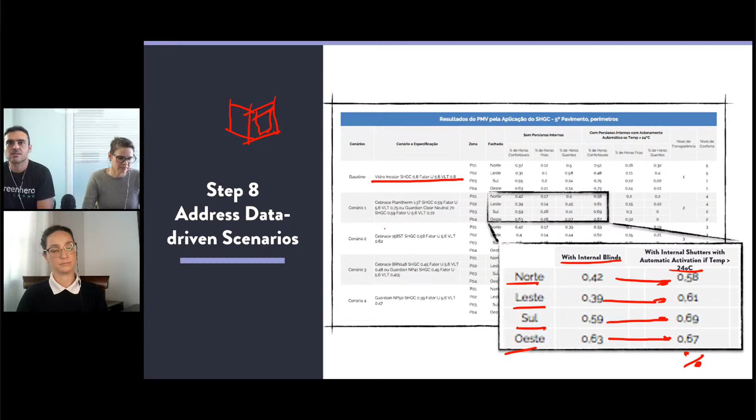Okay, so internal blinds - let's say we have this building here, we have this facade. I'm putting an internal blind that closes right when it's hot. This is just one idea, but I'm analyzing types of glass, lots of types of glass here, as you can see. So this is the way we analyze.

And then we bring some scenarios, and you can do the same when you are a consultant, right? You can be a consultant, or maybe you can be an architect, and you can bring these ideas. Okay, I have 3 facade ideas or 4 facade ideas.

And then we brought some ideas, some scenarios with types of glass, with automatic shadings, and then we improved the performance by 31% in this case, 30 in this case, and 28% in this case. So it's up to the client to choose.

He chose the second option. So we got the second scenario here. It was the winner, right? So this type of glazing with this U value here that you can see. So this is the idea.

You can bring the best to your client, right? This was the winner concept, and you can do the same. I promise you, you can do the same. This is the idea, how you can analyze your design.

So you can see here the project as it was. This is also something that has to be presented to the client - always what kind of big gap that he's jumping by improving. Yeah, so you can see the improvement.

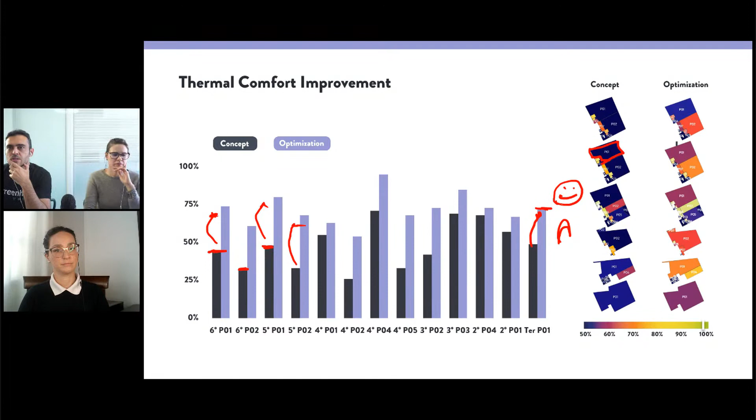You can see each area of this place. We have, let's say, this area here, and we are going to have improvement like this. So more people satisfied, more people happy, more people laughing. Okay, so this is the idea - to bring this, people happy, people happy, people happy, and this is the way to go, okay?

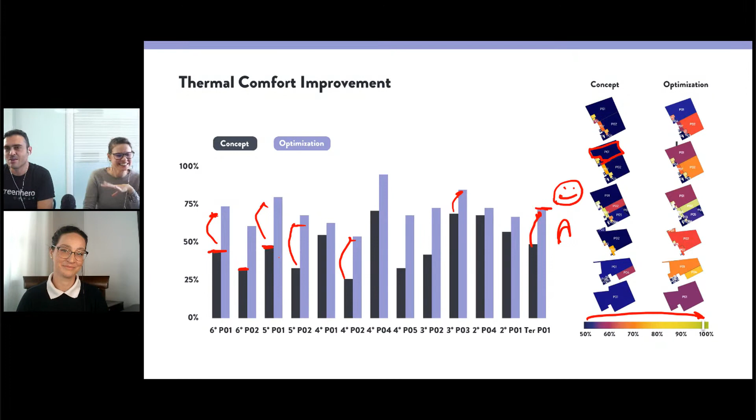I'm just representing people happy. Yeah, you are representing very well, I think. Let's go on, let's represent our happiness. Let's represent our happiness. Oh, I think what it was doing here, right?